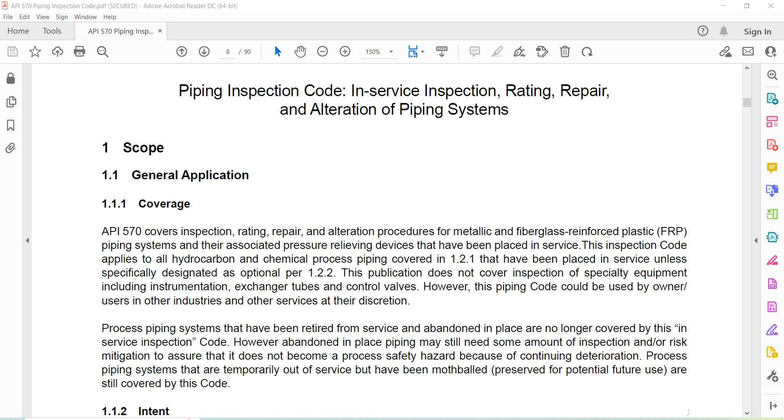Scope. 1.1 General Application. 1.1.1 Coverage. API 570 covers inspection, rating, repair, and alteration procedures for metallic and fiberglass reinforced plastic piping systems and their associated pressure relieving devices that have been placed in service.

The inspection code applies to all hydrocarbon and chemical process piping covered in 1.2.1 that have been placed in service, unless specifically designated as optional per 1.2.2. The publication does not cover inspection of specialty equipment, including instrumentation, exchanger tubes, and control valves. However, this piping code could be used by owner users in any other industries and other services at their discretion.

Process piping systems that have been retired from service and abandoned in place are no longer covered by this in-service inspection code. However, abandoned in place piping may still have some amount of inspection or risk mitigation to ensure that it does not become a process safety hazard because of continuing deterioration.

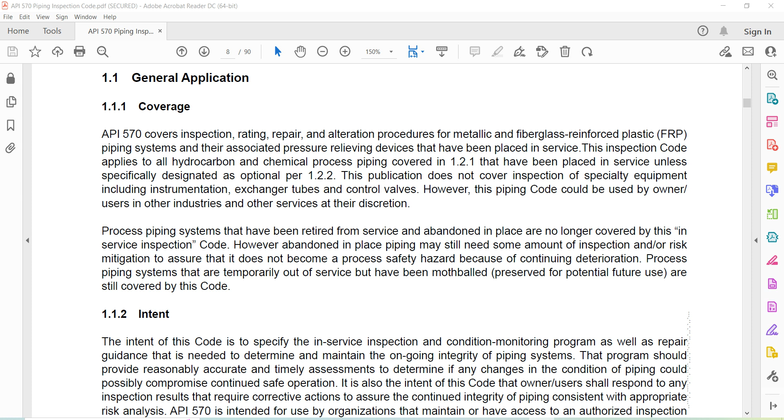Process piping systems that are temporarily out of service but have been mothballed or preserved for future use are still covered in this code. Intent: the intent of this code is to specify the in-service inspection and condition monitoring program, as well as repair guidance needed to determine and maintain the ongoing integrity of piping systems.

The program shall provide reasonably accurate, and timely assessments to determine if any change in the conditions of piping could possibly compromise continued safe operation. It is also the intent of the code that owner users shall respond to any inspection results that require corrective action to ensure the continued integrity of piping, consistent with appropriate risk analysis.

API 570 is intended for use by organizations that maintain or have access to an authorized inspection agency, a repair organization, and technically qualified piping engineers, inspectors, and examiners, as defined in Section 3.

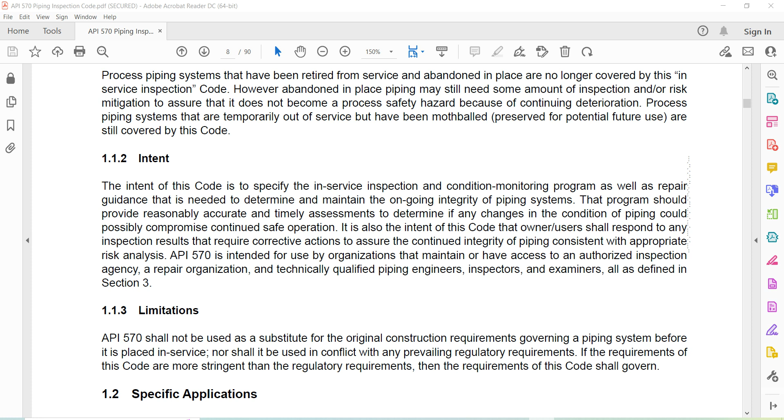Limitations: API 570 shall not be used as a substitute for the original construction requirements governing a piping system before it is placed in service, nor shall it be used in conflict with any prevailing regulatory requirements. If the requirements of this code are more stringent than the regulatory requirements, then the requirements of this code shall govern.

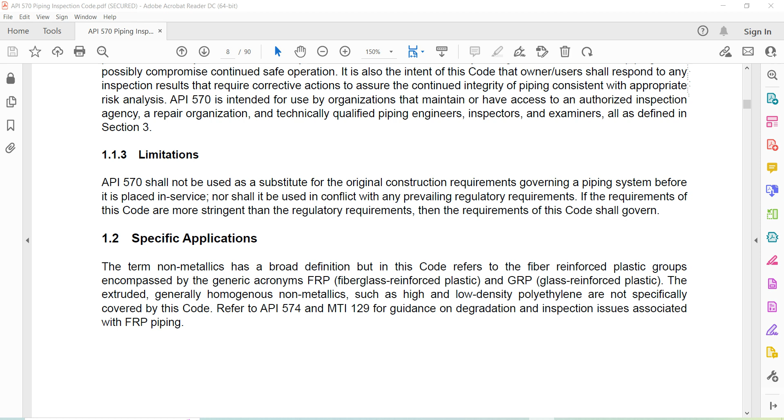1.2 Specific Applications. The term non-metallic has a broad definition, but in this code refers to the fiber reinforced plastics group encompassed by the generic acronyms FRP, fiberglass reinforced plastics, and GRP, glass reinforced plastic. The extruded, generally homogeneous non-metallics, such as high and low density polyethylene, are not specifically covered by this code. Refer to API 574 and MTI 129 for guidance on degradation and inspection issues associated with FRP piping.

1.2.1 Included Fluid Service. Except as provided in 1.2.2, API 570 applies to piping systems for process fluids, hydrocarbons, and similar flammable or toxic fluid services, such as raw, intermediate, and finished petroleum and chemical products, catalyst lines, hydrogen, natural gas, fuel gas, and flare systems, sour water and hazardous waste streams, hazardous fluid service, cryogenic fluids such as liquid N2, H2, O2, and air, and high pressure gases greater than 150 psig, such as He, H2, O2, and N2.

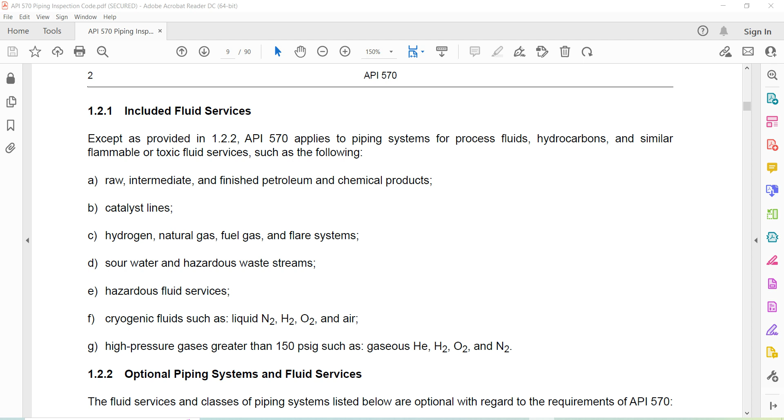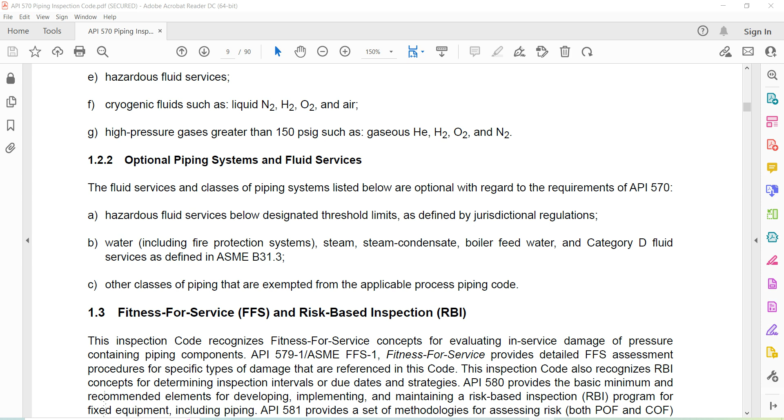Optional piping systems and fluid services. The fluid services and classes of piping systems included below are optional with regard to the requirements of API 570: hazardous fluid service below designated threshold limits as defined by jurisdictional regulations; water, including the fire protection system, steam condensate, boiler feed water, and Category D fluid service as defined in ASME B31.3; and other classes of piping that are exempt from the application of the process piping code.

1.3 Fitness for Service and Risk-Based Inspection. The inspection code recognizes fitness for service concepts for evaluating in-service damage of pressure-containing piping components. API 579-1 ASME FFS-1 Fitness for Service provides detailed fitness for service assessment procedures for specific types of damage that are referenced in this code. The inspection code also recognizes RBI concepts for determining inspection intervals or due dates and strategy.

API 580 provides the basic minimum and recommended elements for developing, implementing, and maintaining a risk-based inspection program for fixed equipment, including piping. API 581 provides a set of methodologies for assessing risk, both POF and COF, and for developing inspection plans.

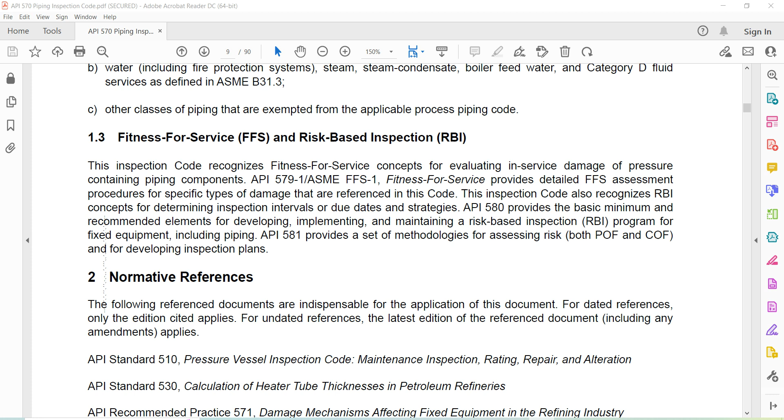Normative references. The following documents are indispensable for the application of this document. For dated references, only the edition cited applies. For undated references, the latest editions of the reference document, including any amendments, apply.

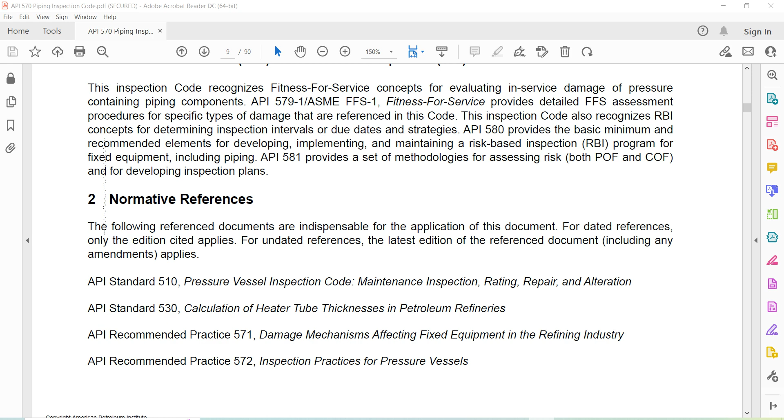You've got your API 510 pressure vessel inspection code, API 530 calculation of heater tube thickness, API 571 practices for damage mechanisms affecting fixed equipment, 572 inspection practices for pressure vessels, 574 inspection practice for piping system components, 576 inspection of pressure relieving devices, 577 welding inspection and metallurgy, 578 material verification program for new and existing piping systems.

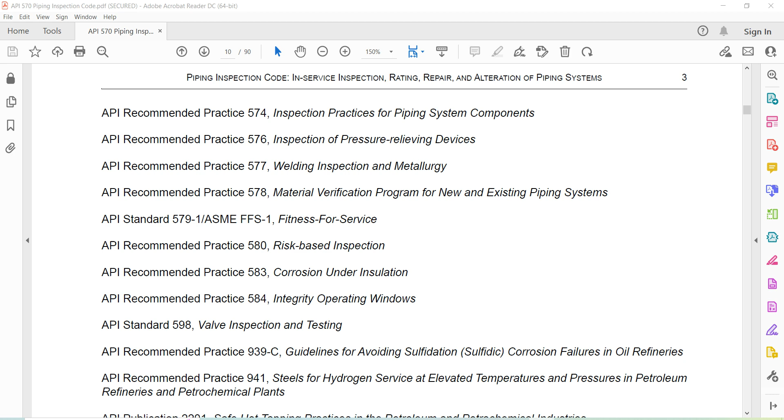579-1, fitness for service; 580 risk-based inspection; 583 corrosion under insulation; 584 integrity operating windows; 598 valve inspection and testing.

939C, guidelines for avoiding sulfidation corrosion failures in oil refineries; 941, steels for hydrogen service at elevated temperatures and pressures in petroleum refineries and petrochemical plants; 2201, safe hot tapping practices in petroleum and petrochemical industries.

B16.34, valves flanged, threaded and welded ends; B31.3 process piping, section 5 non-destructive examination, section 9 welding and brazing qualification; PCC-1, guidelines for pressure boundary bolted flange joint assembly; PCC-2, repair of pressure equipment and piping.

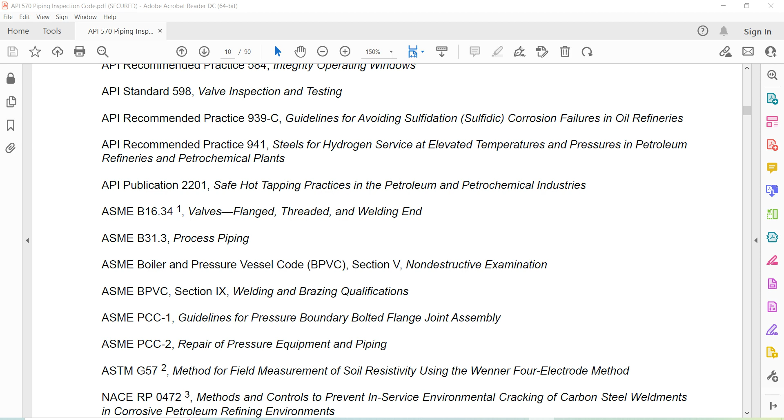G57, method for field measurement of soil resistivity using the Wenner 4 electrode method. And then you've got your NACE 0472, methods and controls to prevent in-service environmental cracking of carbon steel weldments in corrosive petroleum refining environments; MR 0103, materials resistance to sulfide stress cracking.

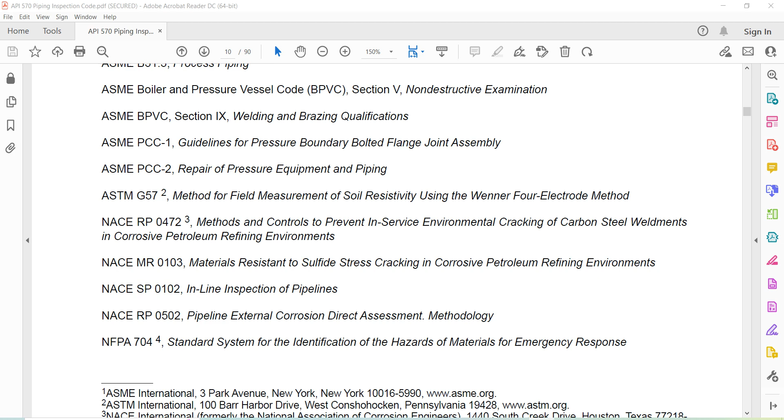0102, in-line inspection of pipelines. 0502, pipeline external corrosion direct assessment. 704, standard system for identification of hazardous materials.

Okay, and then section 3 is your definitions, acronyms and abbreviations.

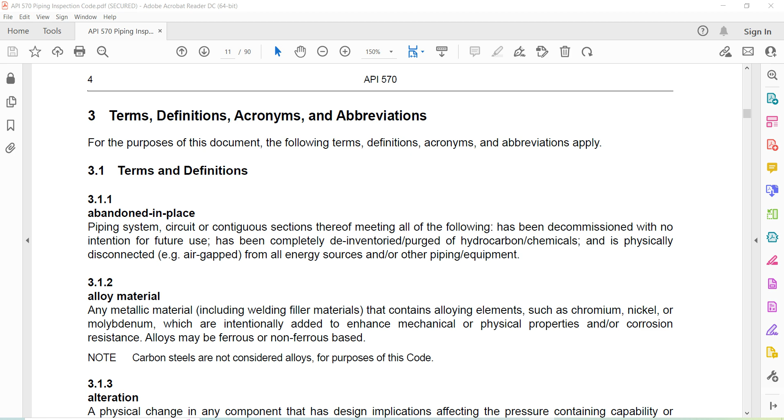3.1.1, abandoned in place. Piping system, circuit, or contiguous sections thereof meeting all of the following has been decommissioned with no intention for future use, has been completely de-inventoried, purged of hydrocarbon chemicals, and is physically disconnected, air-gapped, from all energy sources or other piping equipment.

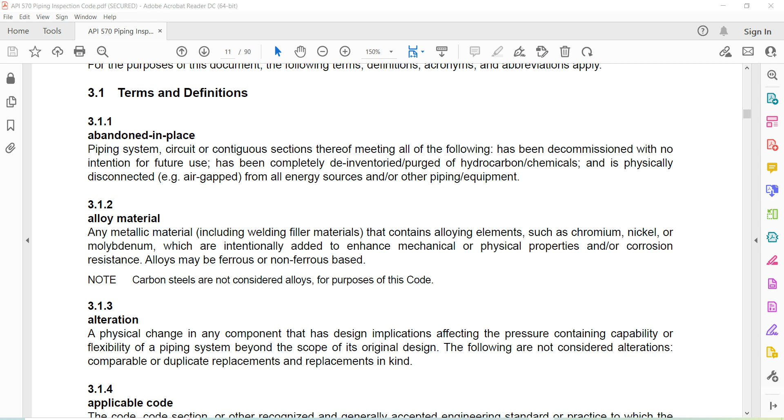Alloy material. Any metallic material, including welding filler materials, that contain alloying elements such as chromium, nickel, or molybdenum, which are intentionally added to enhance mechanical or physical properties or corrosion resistance. Alloys may be ferrous or non-ferrous based. Carbon steels are not considered alloys for the purpose of this code.

Alteration. A physical change in any component that has design implications affecting the pressure containing capability or flexibility of a piping system beyond the scope of its original design. The following are not considered alterations: comparable or duplicate replacements, and replacements in kind. That's an important definition, alteration.

Applicable code. The code section, or other recognized and generally accepted engineering standard or practice to which the piping system was built and which is deemed by the owner-user or piping engineer to be appropriate for the situation, including but not limited to the latest edition of ASME B31.3.

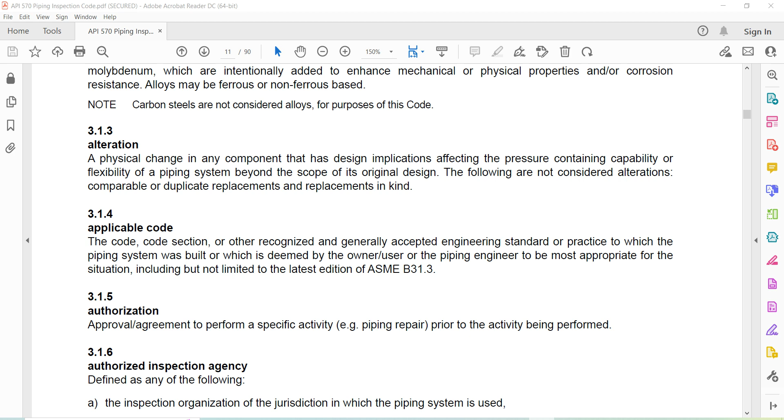Authorization. Approval or agreement to perform a specific activity, piping repair, prior to any activity being performed.

3.1.6, authorized inspection agency. Defined as the following: the inspection organization of the jurisdiction in which the piping system is used; the inspection organization or insurance company that is licensed or registered to write insurance for piping systems; an owner or user of piping systems who maintains an inspection organization for activities relating to his own equipment and not for piping systems intended for sale or resale.

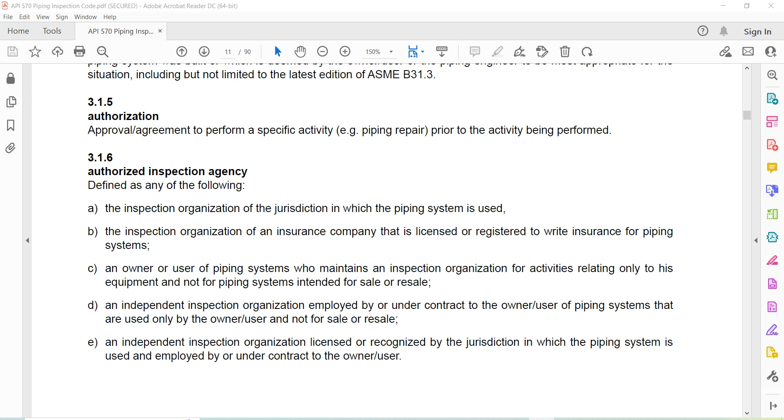An independent inspection organization employed by or under contract to the owner-user of piping systems that are used only by the owner-user and not for sale or resale. An independent inspection organization licensed or recognized by the jurisdiction in which piping systems are used and employed or under contract to the user-owner.